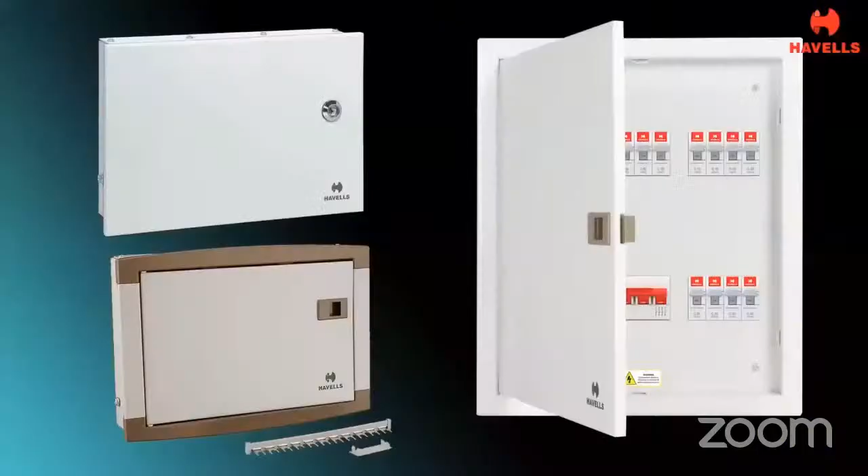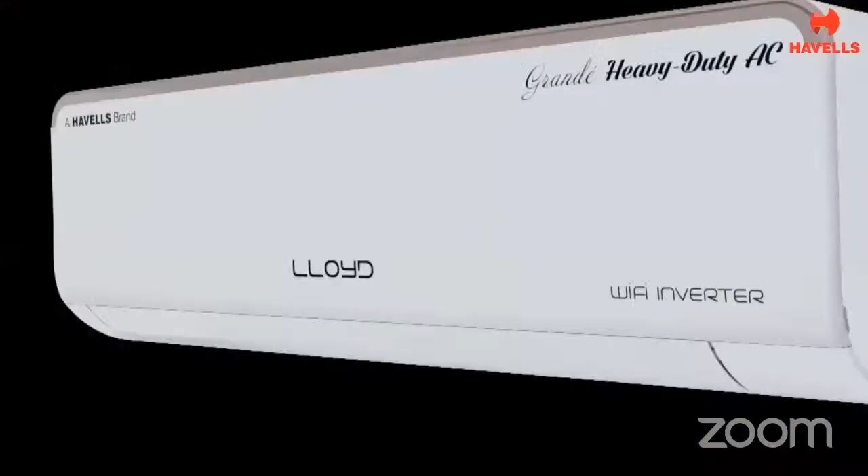For more than 6 decades, Havells India Limited has been focusing on building a better future, a future where technology is used to drive progress, improve business outcomes, and create a better quality of life. Today, Havells stands tall in the FMEG sector as a major power distribution equipment manufacturer with a strong global footprint, owing to its innovative future-ready products for a wide spectrum of applications. With the acquisition of Lloyd in 2017, Havells has made a foray into the high-potential consumer durable segment with offerings of air conditioners, LED televisions, washing machines, refrigerators, and dishwashers. The new synergy further complements the brand's deeper into home's vision. Havells owns some of the most prestigious global brands like Crabtree, Lloyd, Standard, and REO. Its global network constitutes over 5,000 professionals across its offices. As part of its Make in India philosophy, Havells is manufacturing 97% of its products in-house.

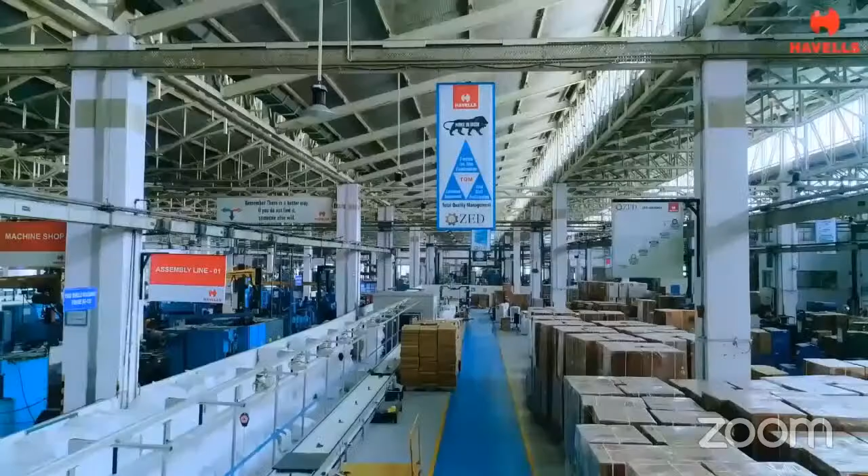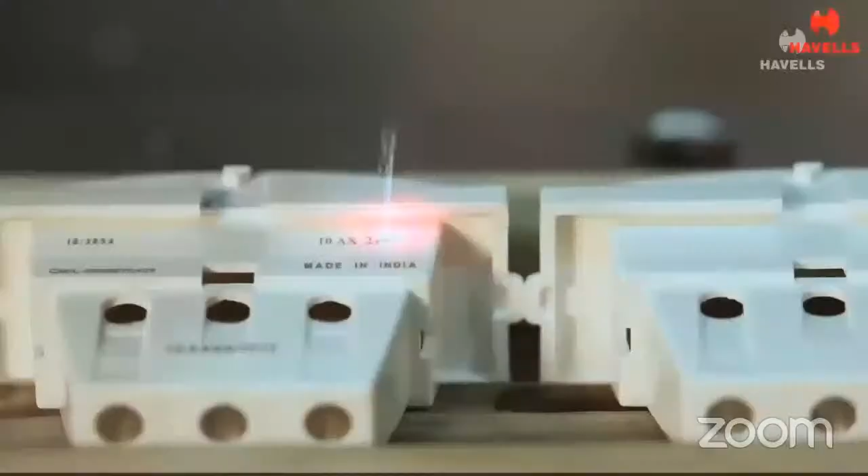With 14 state-of-the-art, fully automated manufacturing plants located across India, Havells offers superior quality and globally benchmarked products to its customers. Havells has set up a large distribution network to set new benchmarks in prompt delivery and service to customers. Over 11,000 dealers, 150,000 retailers, and 700 plus Havells Galaxy exclusive brand showrooms across the country are helping customers choose from its wide range of products.

Havells has a robust supply chain management system with 31 warehouses located pan-India. The meticulous forecasting and demand planning delivers a seamless tracking system.

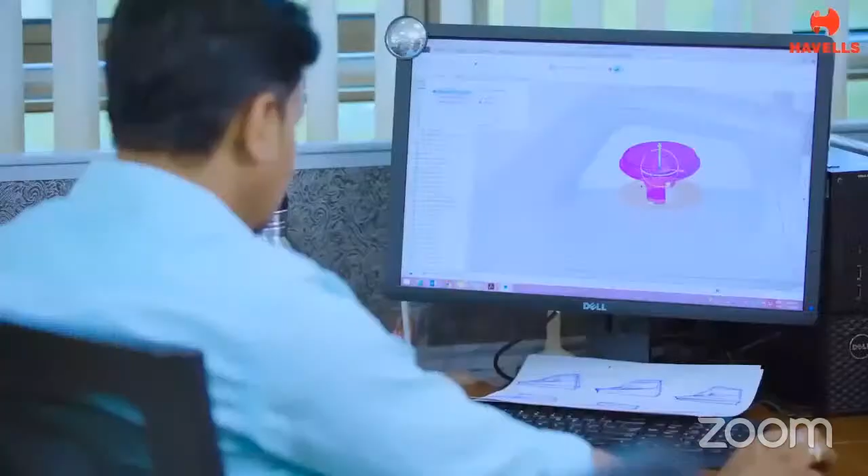Havells is the first FMEG company to offer doorstep service, offering a seamless post-purchase experience. It has the largest service network with 800 plus service points covering 441 towns 24/7 across India. Havells Center for Research and Innovation (CRI) at Noida, with a team of highly qualified engineers and designers, continuously works towards creating differentiated and innovative products while adhering to stringent quality norms at par with international standards. Havells products are certified by nationally accredited laboratories such as CPRI and ERDA.

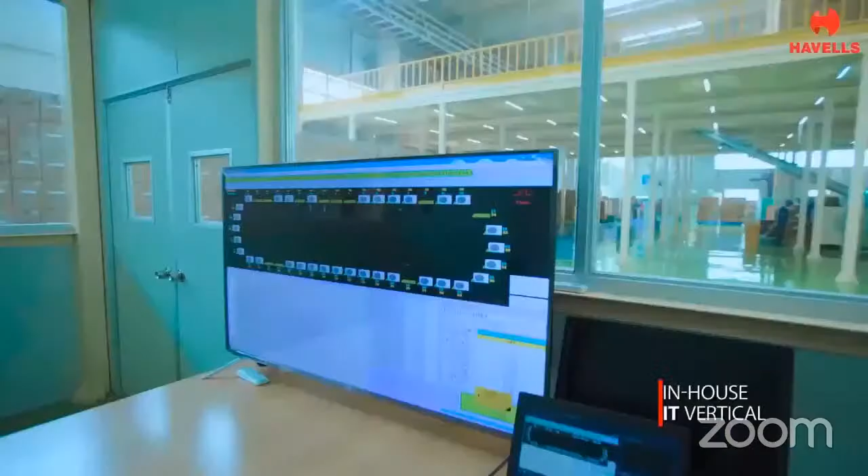Havells has a strong in-house IT vertical which develops innovative technology platforms to support its robust service and supply chain management system. Growing together is ingrained in the ethos of Havells and has resulted in it launching many innovative and profitable schemes for its dealer community.

Havells has strong credentials in B2B and large government projects as well, such as lighting up Kolkata railway station and partnering with NBCC India Limited to beautify and transform the night view of India's heritage monuments like Humayun's tomb, as it believes in the philosophy of spearheading the progress of the nation without ignoring the past.

Havells has taken giant strides to create an innovative world full of possibilities, not only for itself, but also for all its channel partners and customers. With a commitment to improve people's lives and help create a better global society, Havells is inspiring the world and making a difference.

So, dear viewers, you saw the Havells video and the vast range of Havells products and solutions. In our endeavor to take these solutions to our consumers and end users, we interact with the specifiers who influence the decision making in the entire process of selecting these products and solutions for end users and customers. So it was important for us to create a platform, a program where we can get them on board and interact with them, understand them, and also give them an opportunity to interact with the community of our customers and influencers. So we created this program called Havells Insignia about a year ago.

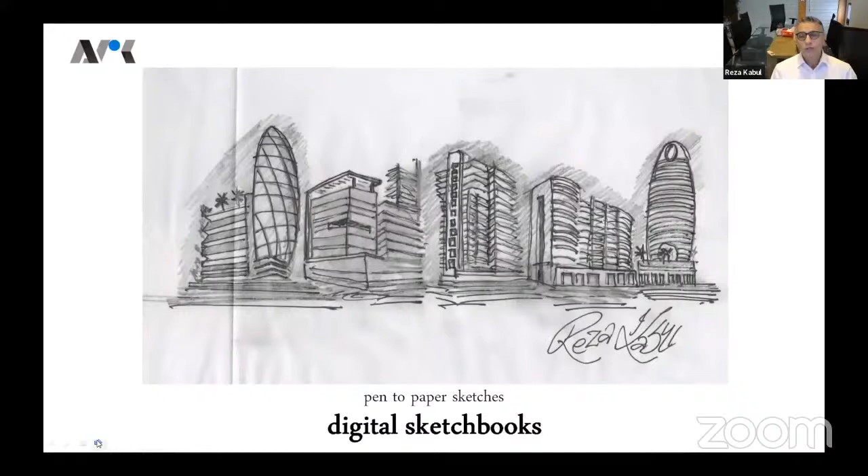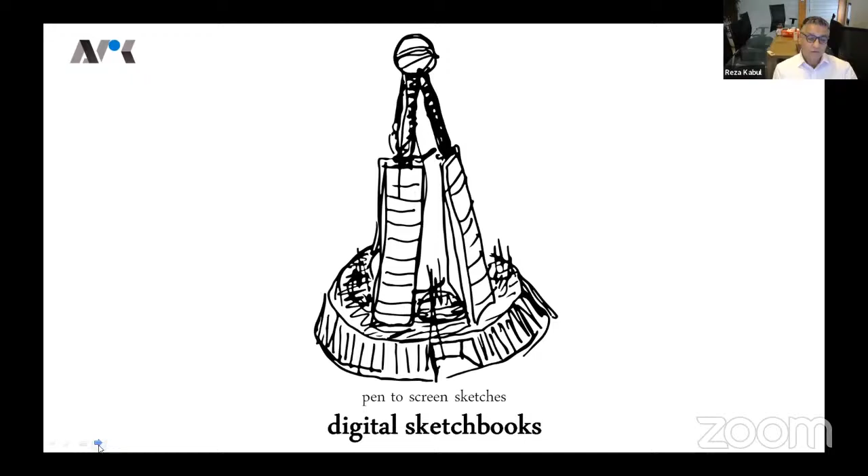So we started moving onto computers and doing software, and from the pencil we came to the digital sketchbook. We started working, doing sketches, but they were all 2D sketches that we used to show clients. We could not do a lot of justice to the design, we were stuck with 2D images and sketches. But of course they are very close to the heart - you can sketch what is in your inner self and express yourself before it's constructed.

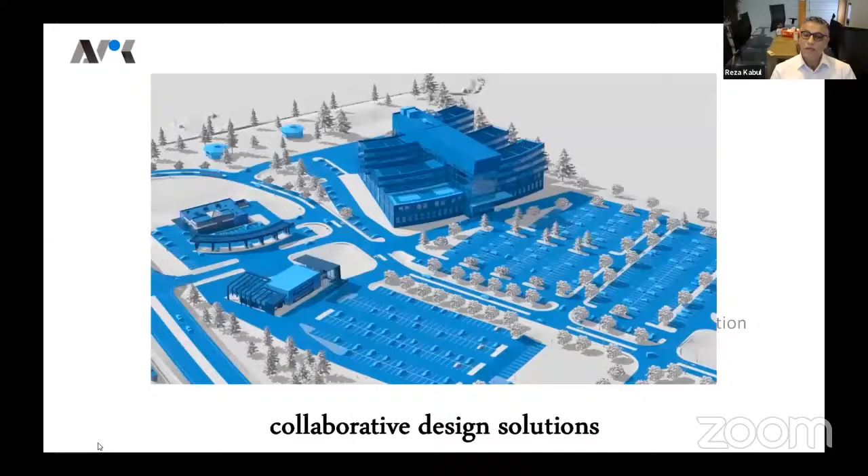With the innovation and introduction of software, we started moving from sketches to computers and BIM, that is Building Information Modeling. From there we started looking at 3D options of the building - initially we used to look at 2D, now we started looking at 3D. We could move into the buildings we were designing, move into any space we were designing, turn the building around, do all sorts of options.

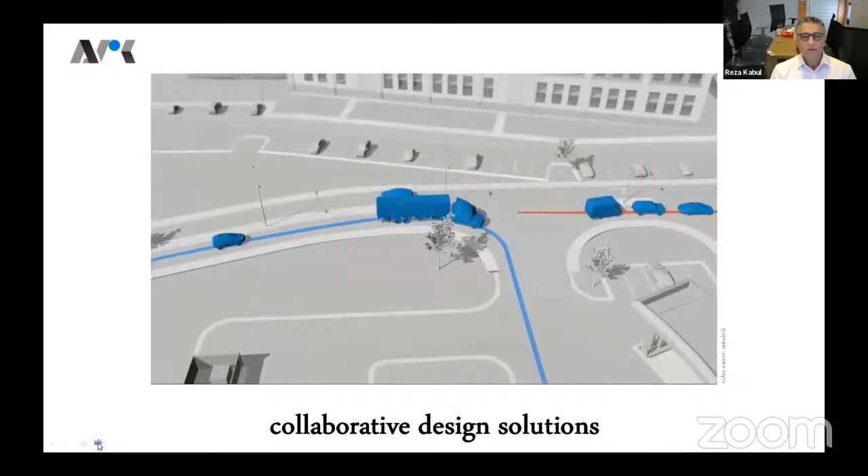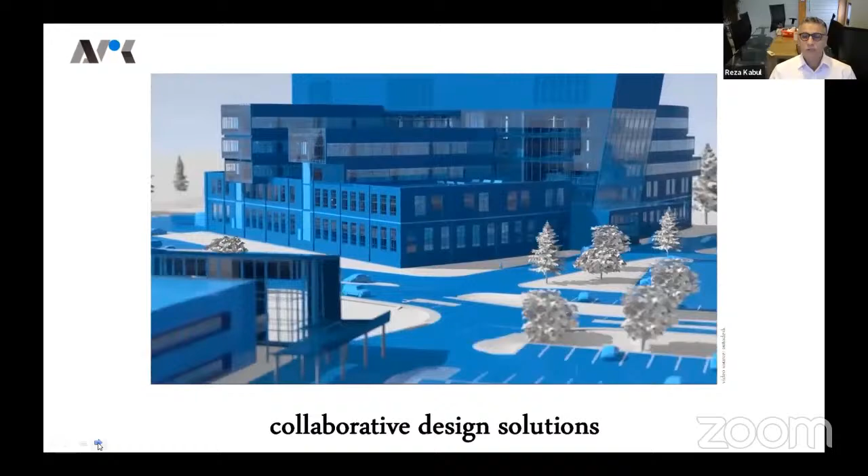Even before we actually build it, we could move around the building and modify everything right through without having to actually build and then break at times. Autodesk brought us all these softwares.

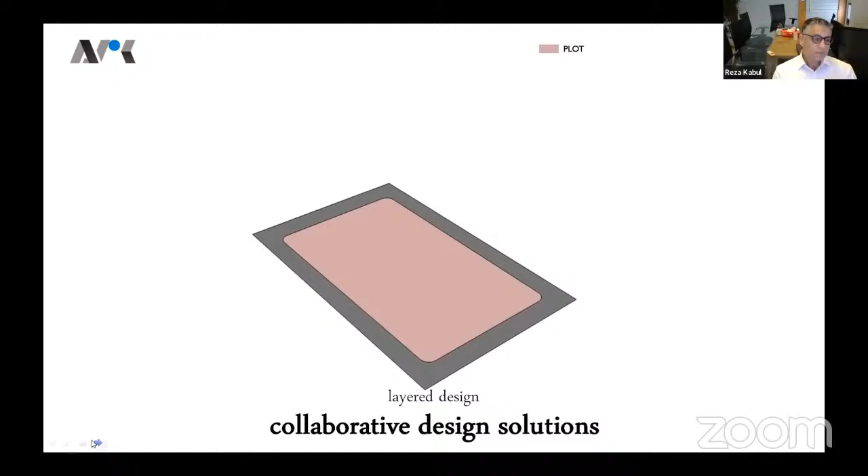So this is an example of a building we did while working through this design process. We had a lot of land and had to design a building on it - the brief was an information and technology building. We started with the requirements, took the ground and started making it into triangular forms. We had a restriction on the building size, the ground coverage was 60%, and we started seeing how we could use it.

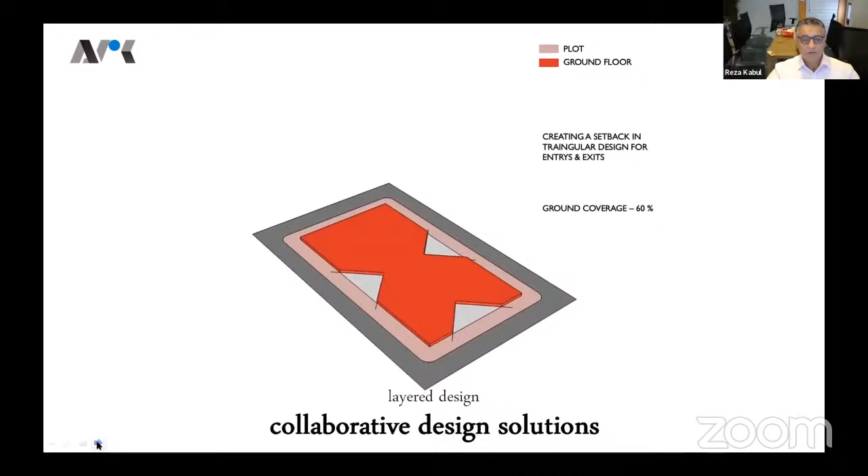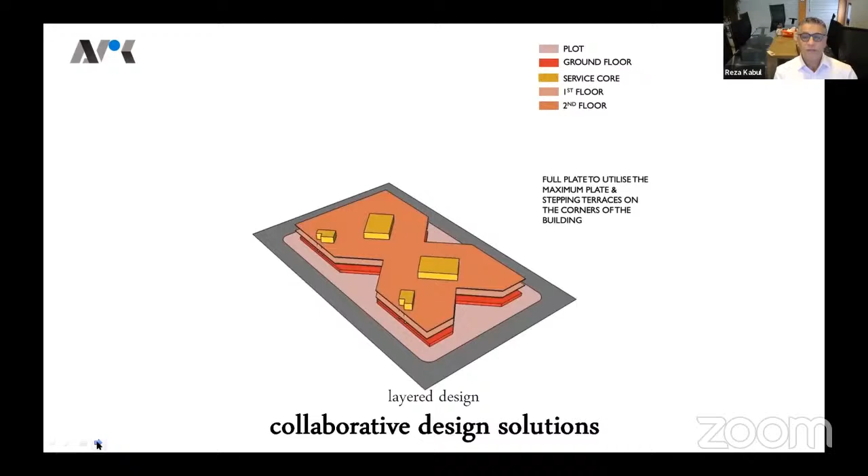We started taking off all these triangular portions and building the whole entire model - these are the different layers. We fixed the core in the center, and figured out how we wanted light to come in and how we could utilize each and every plate and corner of the building, so we could experience everything. With the introduction of all these technologies, we could easily get into the building, feel it, design it, live in the building even before we actually built it.

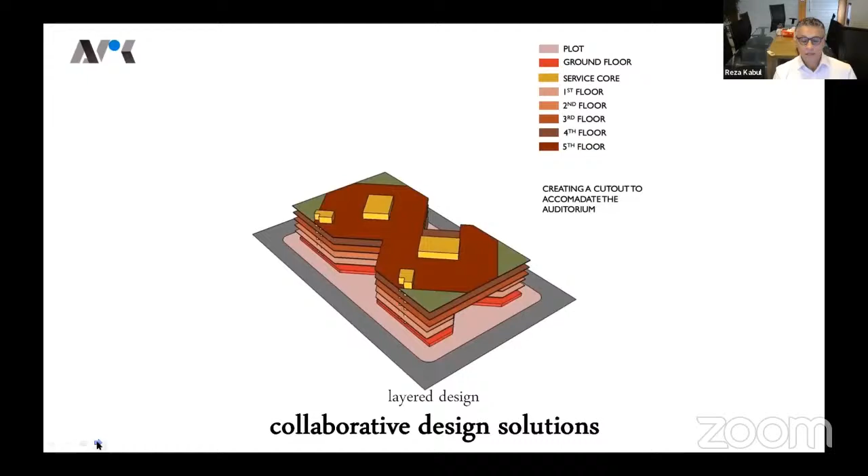We did all these offsets and cutouts, pulled out all the boxes and triangles, and started creating green spaces, seeing how we could incorporate them with the building. It was an indoor-outdoor kind of office space. These are the various floors of the building, and then we did a full entire dia-grid facade around it.

So we did a lot of iterations as well when we were doing this building, and that was possible. We could feel exactly how we wanted to use it, and then we came to the final design solutions.

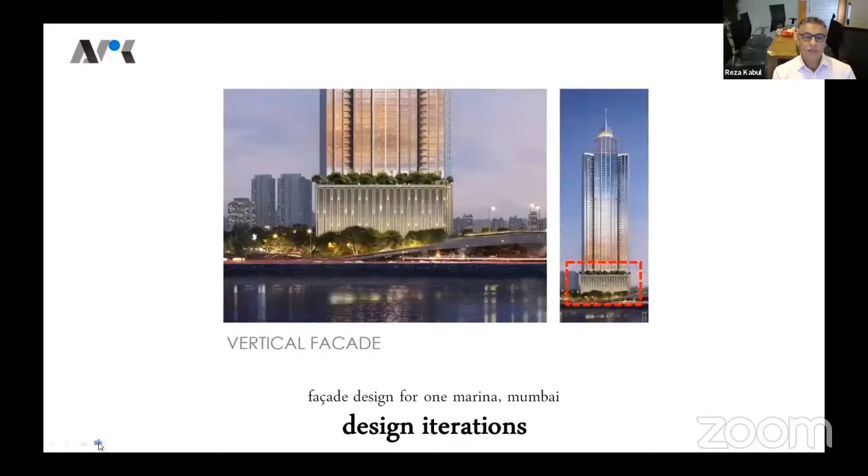Then this is another project. What we are doing is we wanted vertical facades, and we wanted to see which would be the best facade on this surface. So we tried various options. Now these options are possible because of these technologies and the softwares that are available. You can simulate them, you can actually see how it would move, what would happen.

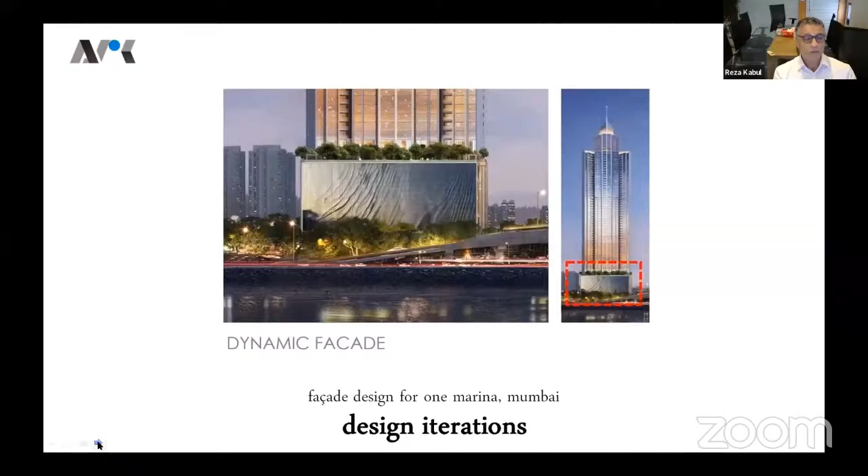So this was kind of a dynamic facade we tried there, because the site is opposite the sea, so we get a lot of breeze. We wanted to do something which was a dynamic facade. So we tried this, and we did a simulation so we could see, with the wind pressure coming, what would be the movement at various times, at various wind pressures, and what different forms would be derived from this. This was only possible because of the use of technologies. This was another iteration we did.

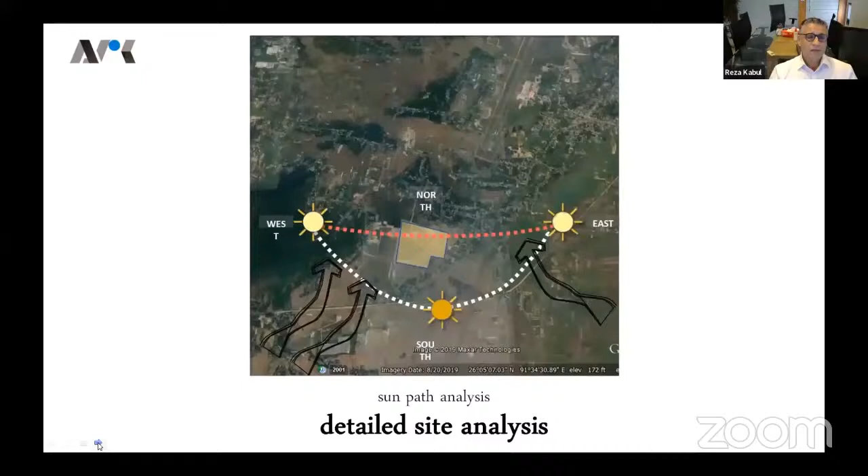So it's really the technology that has changed. Even before we design the building, we take the site and do all kinds of study, the sun path, and this is a project which is within the city with a lot of buildings around it.

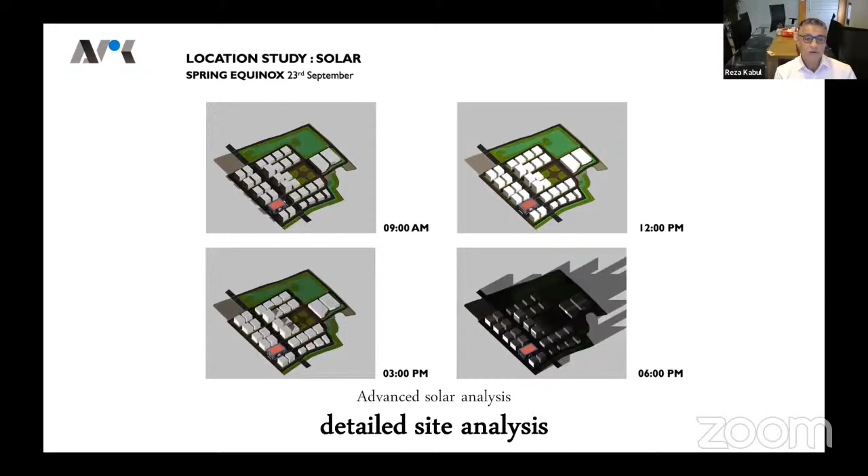So we did the total sun study, the solar path study at various times of the day, and what would be the implication of the building on the surrounding site, and the implication of the surrounding sites on our building. By doing this, you exactly know how much light you would get into the building and how much you don't want, which light is preferred - north light is preferred for offices - and in what time zones, and how do we screen them.

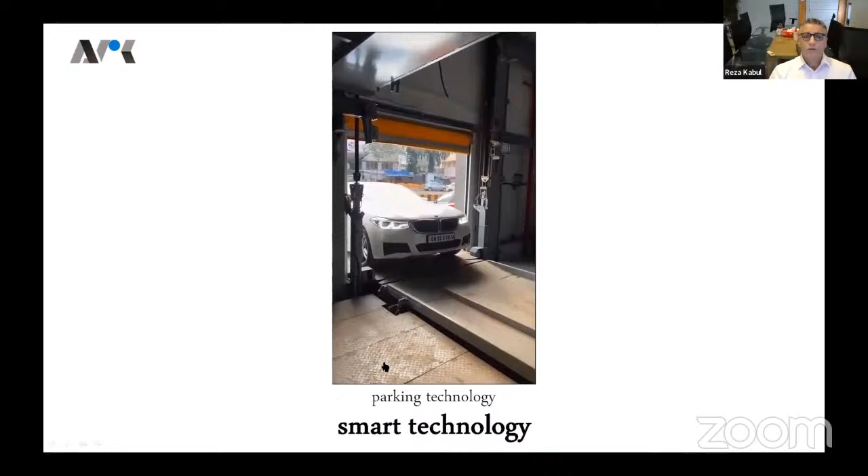So these are all possible with automation and the technology available today. Even the introduction of parking systems came in - this is a very small, tight site we did in Mumbai, in downtown Mumbai. In a normal course, this building would not have been possible, and even if we could achieve the building, we couldn't achieve the parking numbers.

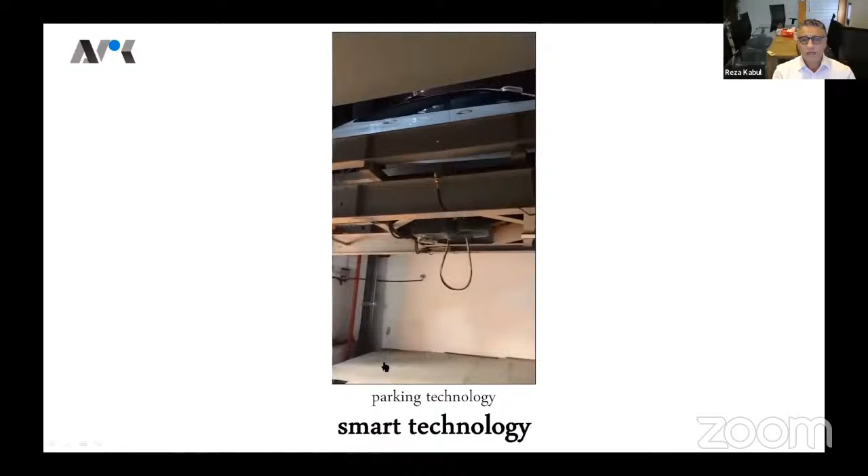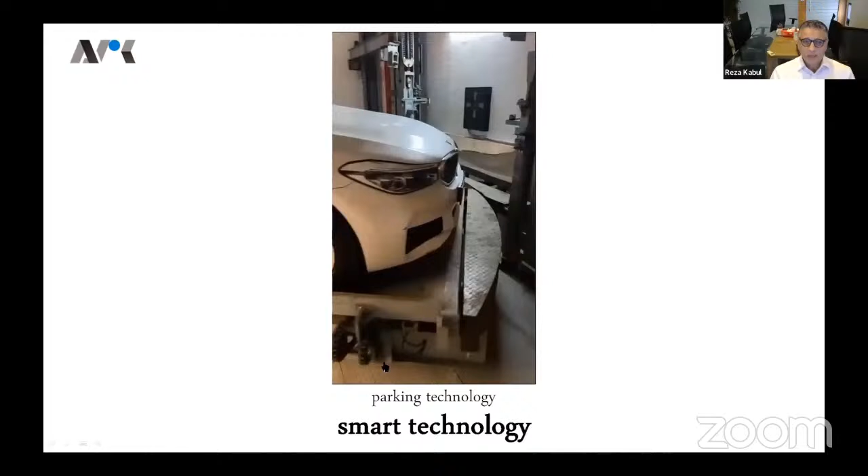Now it's a very high-end building, and if you don't get the number of parkings and you don't get the high-end cars parked, nobody's going to buy an apartment there. Technology made it possible to achieve the parking numbers in a very small space as well - how the car moves up. This video is physically after the building is completed; we got it done so we could show everybody. It was a major challenge, but we managed it just because of innovation and technology.

The other things we do with technology is we can see photorealistic images of the buildings or of interiors even before you start the building. When you're conceptualizing the building, you can see the different colors, different angles, different levels. You can set the eye at maybe the 50th floor, or go see a worm's eye view, whatever. Everything is possible, and we can change colors, we can change lighting systems.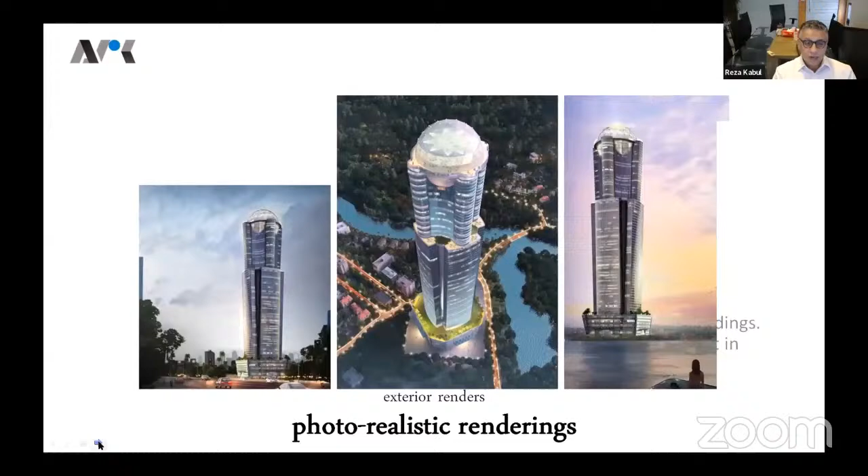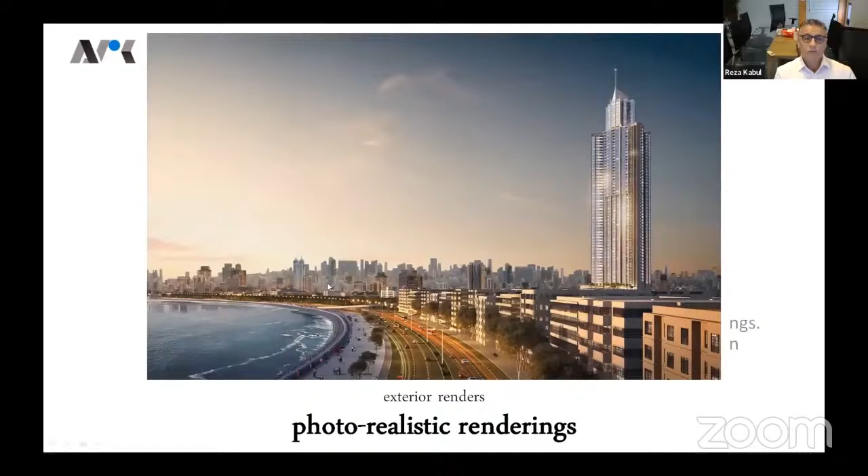This is another one where we took the image of the entire site and then placed our building inside it to see how it would stand out when completed. This is a photorealistic image, again a rendered image, so you can see how close it is to completion, and it actually gets done this way.

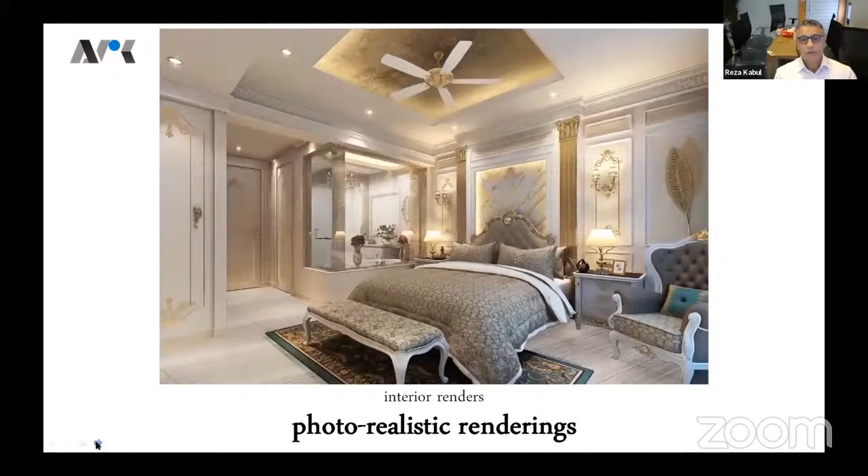These are some various interior views, and that's it.

Thank you. Thanks, Architect Kabul. Those were some very interesting points that you highlighted.

I need to ask you, do you also do site visits through Google Earth? Of course, that's the fastest today. We can fly through the entire property, and in India we still do not have a lot of 3D images on Google. But overseas, you've got 3Ds as well, so you can exactly see. It saves a lot of time. You can do a lot of study. You can even see the contours on the land, the surrounding buildings, what the height of the buildings are. So you can do a lot with technology. Sitting in one place like today, it was not possible before.

Initially we never thought Corona, the pandemic, taught us that we could do Zoom calls and all kinds of video conferencing. It was always there, but we never used it so extensively. Today we are sitting in different parts of the city or world, and we are still communicating with each other.

That's true, that's true. Mr. Yadav is also there with us. Mr. Yadav, what do you have to say? Technology has changed, like Architect Reza Kabul just demonstrated, how it has changed the entire way of architectural working. How have you seen this change, and how are you adapting to this change with influencers?